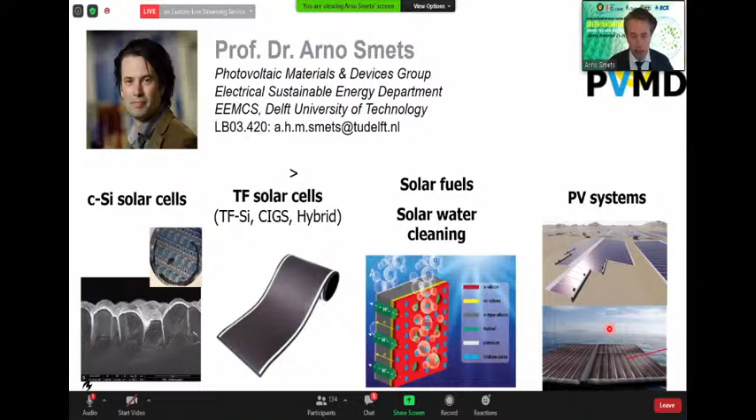And next to that, I've developed on campus, but also online, an education portfolio related to solar energy technology and solar energy engineering. And here you see massive open online courses which we provide on the edX platform, where we already reach more than 500,000 students around the world.

So, talking about energy and the energy transition, it's already 5 years ago that almost 200 countries in the Paris Agreement agreed on introducing policies and a strategy to try to limit climate change in terms of increasing global temperatures to 2 degrees Celsius in reference to pre-industrial times. And it would be very nice if we could limit this to 1.5 degrees Celsius. So these are the policies in place. And usually when I have to explain climate change to students, I make a very simplified picture of what the challenge is.

The challenge is like handling solar energy, because if you look at planet Earth, all processes on the surface of planet Earth, the energy source for that is the sun, the sunlight. And if you look at the temperature of planet Earth, we get an amount of energy in power, which is the solar light, but also planet Earth as an object which has a certain temperature is emitting in the very far infrared electromagnetic radiation out into space.

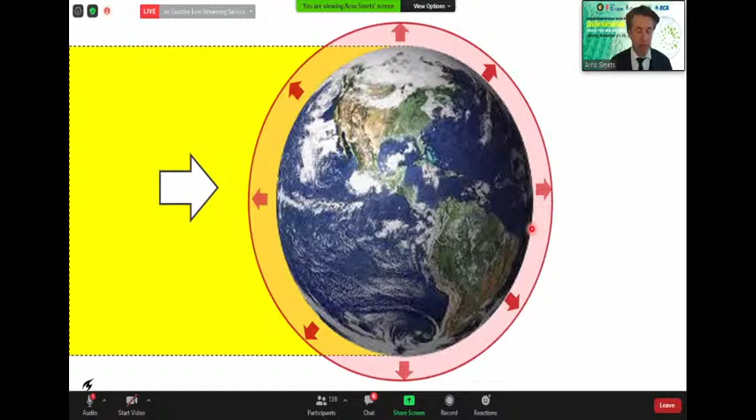And this is no problem if the amount of energy coming in is equal to the amount of energy going out. So then basically the thermal budget of planet Earth is neutral. However, due to our addiction to energy and using fossil fuels as energy source, we are emitting greenhouse gases. CO2 is the dominant one, and that is putting a blanket around planet Earth in which the cooling down mechanism, being the emission of this infrared electromagnetic radiation into space, is hindered. And basically what we see is that we have a little bit more energy coming in than is going out. And this additional energy is stored as thermal energy.

It's already a technological challenge to measure basically what is coming in and going out. You have, for instance, the NASA CERES project, where they try to do this with satellites in space. And the estimate currently is that there is a small energy difference of 0.6 watts per square meter. That sounds to be a very small fraction. But if you do the simple calculation on the back of the envelope, and let's say we would push this excess of energy into the column of air in the atmosphere per square meter, it means that you can heat up the atmosphere by almost 2 degrees Celsius in one single year.

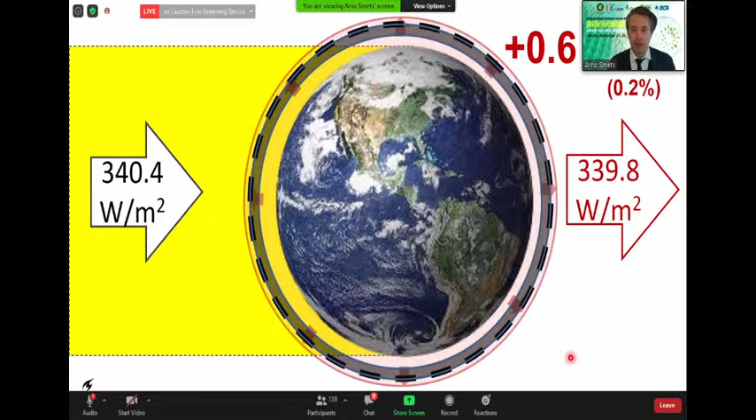This is not happening, and why is it not happening? Because on planet Earth we have the oceans. These are a heat sink, and they consume a lot of this additional thermal energy which is left behind on planet Earth at the moment. And thanks to the heat sink of the oceans, we don't experience the temperature increases in the atmosphere as compared to the 0.6 watts per square meter.

So this is due to the greenhouse gas emissions, and here you see our global CO2 emissions related to only energy. Here we emit a little bit more than 30 gigatons of CO2 into the atmosphere. A lot of that is consumed by the oceans again, a lot of that by vegetation or algae in the oceans. And a small fraction of that is building up in the atmosphere, so the CO2 concentrations are increasing. And still we are increasing. 5 years after the Paris Agreement, the CO2 emissions are still increasing. This year it's expected, due to the limited economic activities due to the pandemic, that this will be decreasing by maybe 10–15%, but that of course is not structural.

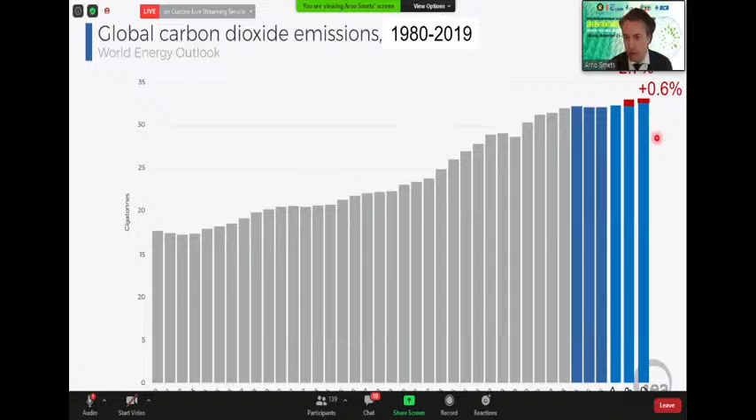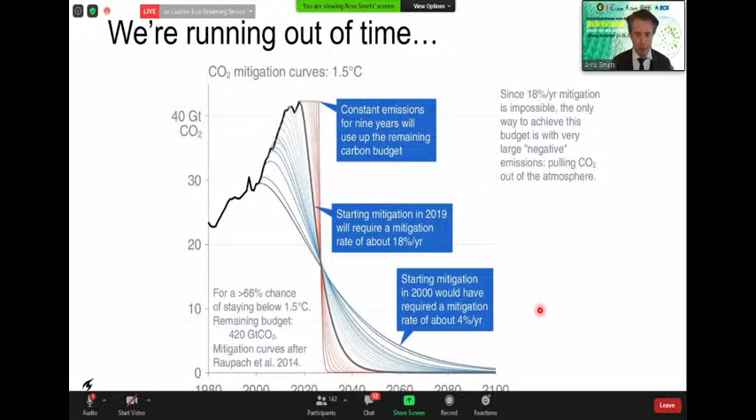And if you look at the Intergovernmental Panel on Climate Change, to keep us, for instance, at a scenario in which we allow the average global temperature to increase by only 1.5 degrees Celsius in reference to pre-industrial times, you see that our CO2 emissions have to go down very quickly to zero. And many scientists even believe that the measures agreed on in the Paris Agreement will not be sufficient to meet this target, and also that in the second half of this century we have to have negative CO2 emissions. So it means that we have to capture and store CO2 as well to meet these targets.

And unfortunately, if we look worldwide, the access to energy and the access to electricity is not equally distributed. So we also have to move to an energy system in which we have a fair distribution of our energy sources. And in my view, solar energy is playing a very important role in that. And to show the importance of solar energy, I first would like to show what nature is doing itself.

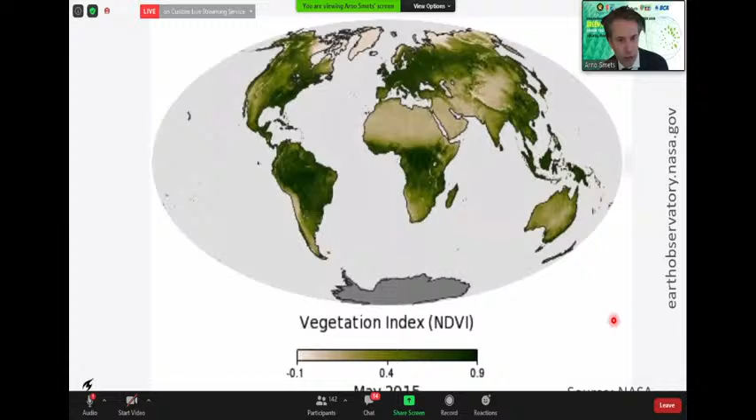But now, how efficient is the whole ecosystem of planet Earth? How much sunlight can it convert into biomass? So I've done a simple back of the envelope calculation, and basically if we average out over the entire surface of planet Earth, then we arrive at a conversion efficiency of 0.05 watt per square meter. That is the amount of energy which nature, algae in the oceans and vegetation on land, is converting into a chemical fuel.

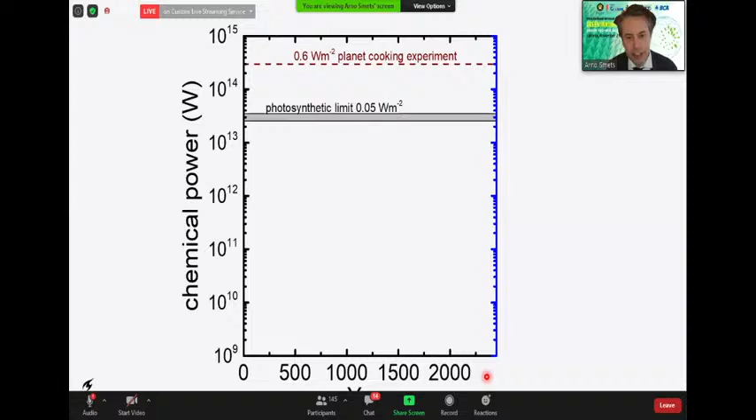And on this axis I have the last 2,000 years on the horizontal axis. So first of all, the world population has been increasing very fast. And certainly from the Industrial Revolution it basically has exploded. So if you just think in the concept like okay, we need energy, and the first primary energy source we need is food.

You already see how much chemical energy has to pass our stomach, and if you look at the natural supply chains of making vegetation, turning that into feedstock, animals and meat, it means that around 7 to 11% of the total photosynthetic power has to pass our stomach. So that is only in terms of food, and this is if you also add our energy consumption, which is usually 20 times more than the 2,500 kilocalories of energy which we need as humans.

So here you see that basically we would have to cut down almost every plant growing around the world. We would have to consume all the algae to supply our energy needs. So it shows that our energy consumption is far from sustainable. So we have to go to sustainable energy technologies.

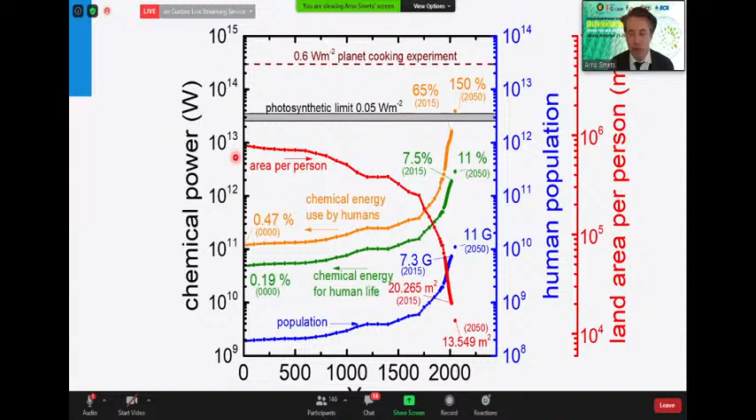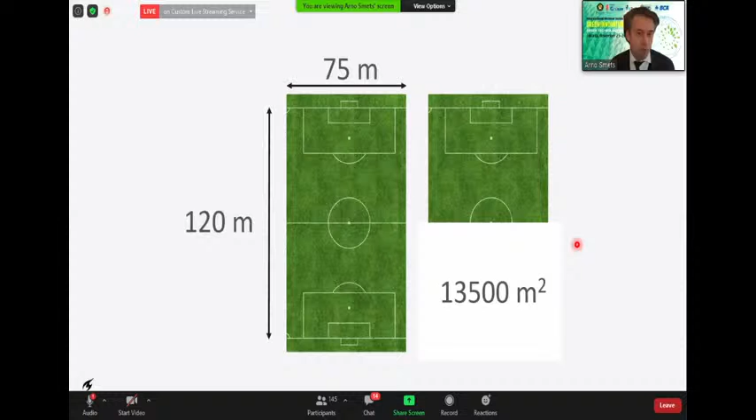And of course, one of the challenges is that due to the growing world population, the amount of area per person which we have is also limited. In 2050, the world population will be so large, and in Europe we always define areas in terms of soccer fields. So worldwide, we will have per person 1 soccer field of land area. And if you then look at highly populated areas like the Netherlands, there we are rather poor. We only have 1/4 of a soccer field per person.

And these are the challenges, because we have to grow our food on this area. We have to live here. We have to build our infrastructure here. And we have to generate our energy on this area. So these are the challenges.

And if you look at the current situation, we use worldwide on average 65 kilowatt hours per person per day in primary energy, which is equal to a continuous power of 20 terawatts. And let's assume that all this energy, which is not going to happen by the way, would be generated by photovoltaics, so solar electricity, and that we would store this energy and then use it again. Including the losses in the storage cycle of 50%, we would need an area like this covered with solar farms to supply our energy needs.

Of course, there are more technologies to do that. Let's say if you would do this fully with wind energy, so offshore, we would have to cover an area like this with wind farms. So these are enormous challenges.

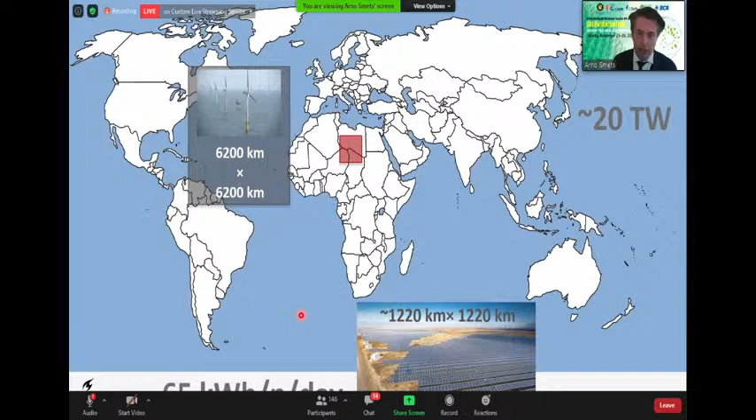So what we see is that we have to become more energy efficient, reducing this number, and we need an intelligent mix of different energy sources to generate energy in a renewable fashion, such that we do not emit CO2, then distribute it and store it in an intelligent way, and then consume it also in an intelligent way, where we focus on energy efficiency in our consumption.

And here you see a little bit of philosophy. If you look at green technologies for generation of energy, like solar, wind, or hydroelectricity, it shows that electricity is becoming the dominant energy carrier. So it will replace for a large part chemical fuels and the fossil fuels as we know them today. It also means that the whole energy infrastructure has to be changed.

Looking at generation, which will be more decentralized, the distribution, storage will become a very important challenge, and also the technologies in consumption. So if you think in terms of mobility, it's moving to more electrically powered mobility, or maybe even hydrogen powered mobility in the future. But also in regions of the world where heating or cooling is important, these will be technologies which are more electrified.

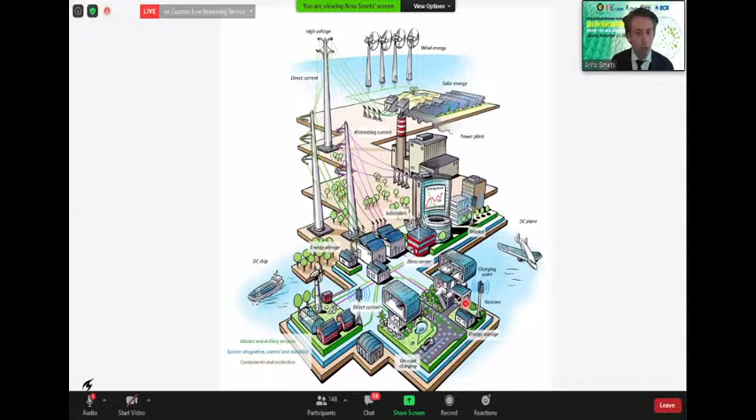And then I arrive at energy transition models. In the world, you have several stakeholders who develop energy transition models, showing that with current technology, can we move to 100% renewable energy infrastructure? You have various scenarios, for instance by oil companies, by the International Energy Agency, and supported by the Intergovernmental Panel on Climate Change. But for me, one of the most inspiring energy scenarios is that of the Energy Watch Group and Christian Breyer. He's a professor at LUT University in Finland, which has done this calculation in great detail for the entire world.

So every region has its own challenges in the energy transition. But this report shows that you can successfully go to 100% renewable energy infrastructure, even without using CO2 capture technologies, as I mentioned earlier, with existing technology. What you see in this transition model is that electricity is becoming the dominant energy carrier.

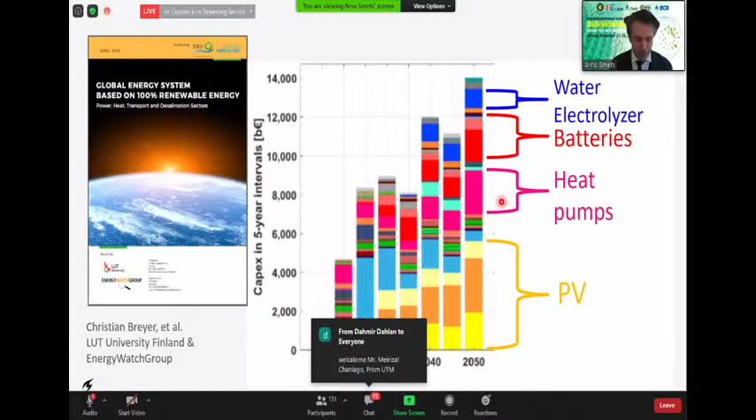So, as solar is so important - and of course it's my field of interest - I will focus on solar electricity, because if 69% of our energy should be generated by photovoltaics, we need a very reliable technology with very high conversion efficiencies per area, so very high yields.

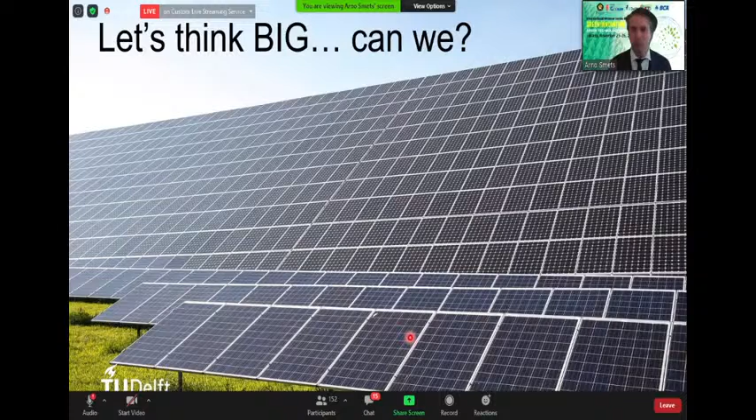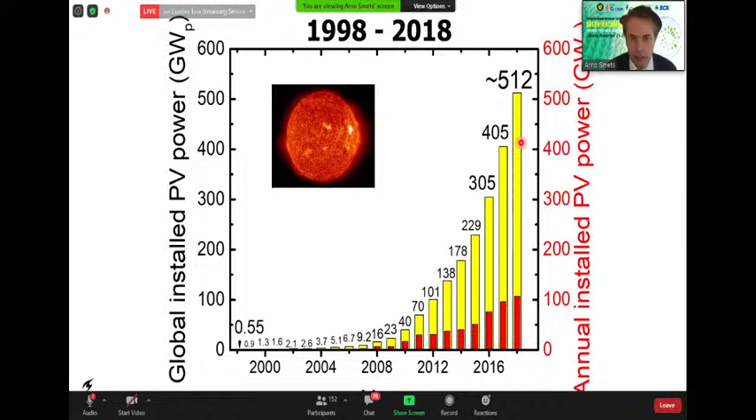The yellow line is the cumulative installed power, and the red is the annual market, the annual total capacity added worldwide. You see that this is around 20 to 25% of the cumulative installed. So PV still demonstrates an exponential growth.

This is very important. If you look at different energy generation technologies over time, here is our energy demand growing due to world population growth and rising average living standards. Take hydroelectricity: with the introduction of the Francis turbines, we were able to efficiently convert the potential energy of water over a height difference using dams into electricity. Here you see how the total installed effective power, meaning the real power being delivered, has evolved over the last century.

Here you see, for instance, nuclear energy. The vertical axis is a logarithmic scale, and you see generation technologies increasing first in an exponential phase, then reaching a linear phase, and then the technology saturates. If you look at the two biggest new renewable energy generation technologies, wind turbines and photovoltaics, you see that we are in an exponential growth phase as well.

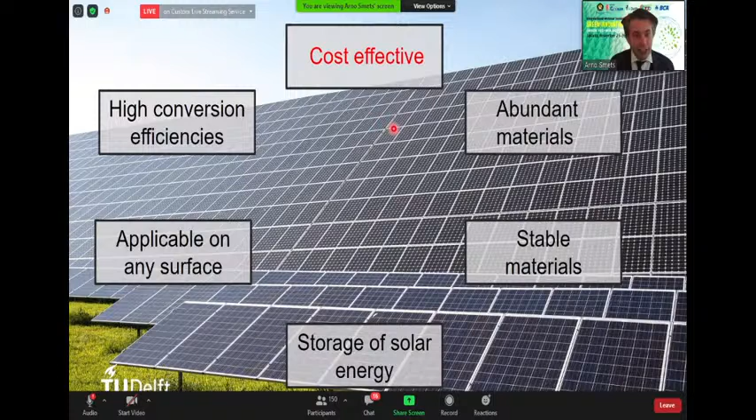This is what we call learning curves. Interestingly, we as human beings always have trouble thinking in double logarithmic plots, because we always underestimate how fast a technology can become cheaper and competitive. This is one of the reasons why the International Energy Agency underestimates the important role of solar electricity in the future.

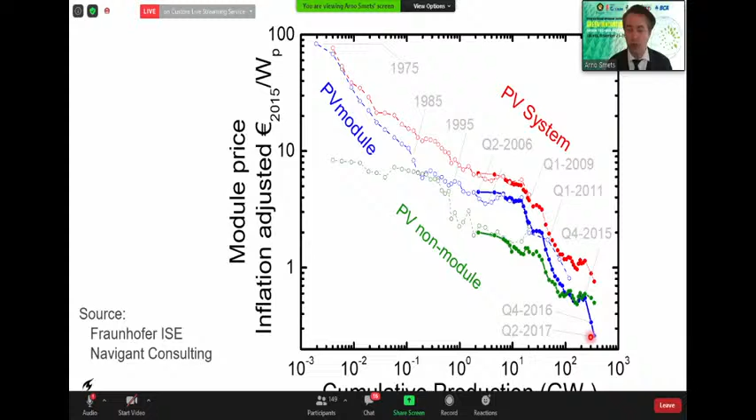That is included in these costs. So what you see now is that the modules are not even the most expensive component of a PV system anymore. It's all the other stuff which is more expensive.

That's quite interesting. Of course, if you look at the energy infrastructure, it's more than only generation. It's generation, distribution, storage, and consumption. But in terms of generation, renewables are becoming very cheap. In that sense, they are becoming a kind of disruptive force in fossil fuel-based energy infrastructure.

So now let's move to the PV technologies. For PV technologies, you often have the very famous chart of NREL. I lost it in this presentation, but I usually present the different technologies in terms of efficiency, but also in terms of area.

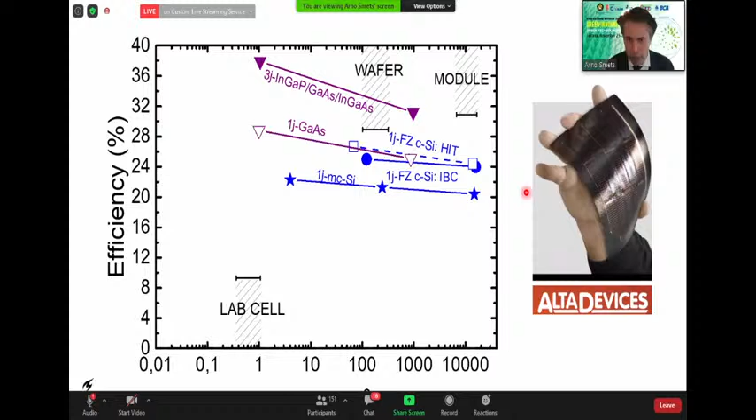And then you have the thin film technologies. The biggest manufacturer worldwide is First Solar. They make solar cells based on the semiconductor material cadmium telluride, using a very thin layer of material, not more than 5 microns, so that's 0.005 millimeters. The thickness of the semiconductor material for crystalline silicon is in the order of 140 to 180 microns, so these technologies are a factor 100 thinner compared to the conventional technologies. So you use less material. It also gives the advantage to develop next generation PV modules, like the flexible module you see over here from Alta Devices, and I will come back to this technology. What you see is that the conversion efficiencies are lower than crystalline silicon, but you use less material and you might produce this at much lower cost. But I will come back to that.

And then you have the new materials rising at research institutes and universities, based on organic type semiconductor materials. The new kid on the block currently is perovskites, and a lot of research is being done at universities. Both materials still face problems because they are not very stable yet. For instance, perovskites may suffer from light and temperature, the material decomposes, and they are also not very chemically stable, so you have to spend a lot of money encapsulating and protecting them against moisture and water, because water chemically breaks down and dissociates these types of materials. So they are only in the research stage, there are no commercial products on the market, and it's still a challenge to even bring them to the market, in my view.

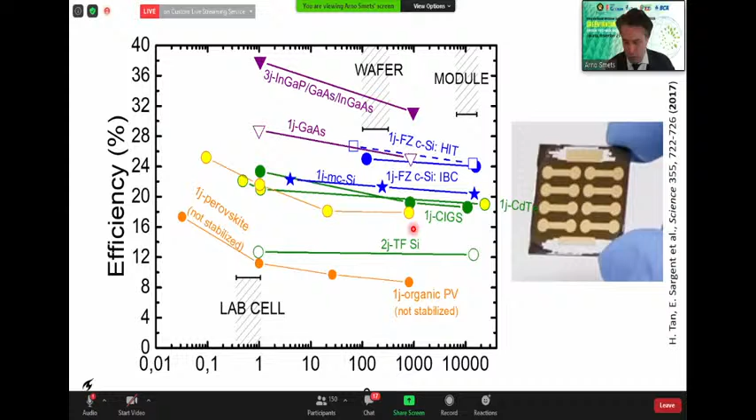So what I will be focusing on is the thin film here, and certainly the thin film silicon technology. We are working together with the HyET Solar company on developing this technology, which in certain metrics will have a lot of advantages. It will give different opportunities to different applications than the nowadays dominant crystalline silicon technology.

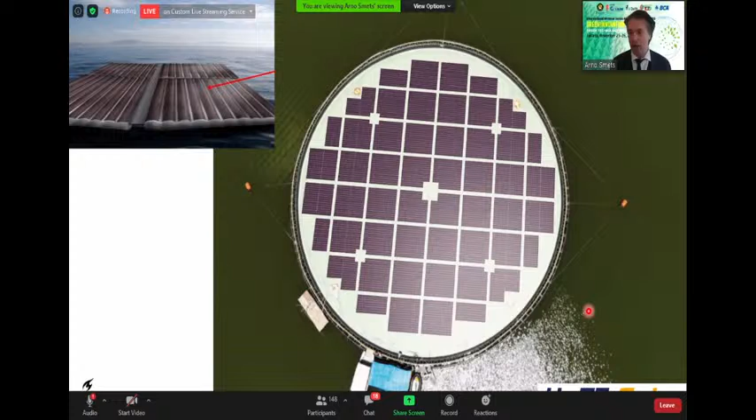And if you look at large-scale utility, here you see a visionary plot where you can simply roll out this lightweight, flexible PV technology. So it's easy installation, but you also need much less mechanical components to mount the systems, which is currently a very important part of the cost price of the technology. So it's a new technology which allows the entire system to go to lower cost.

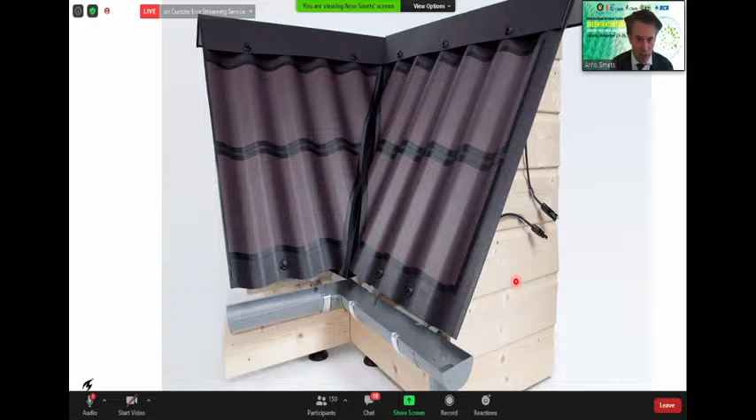But even in the Netherlands, for instance, we have many industrial buildings with flat roofs in which the construction is built just to hold, in the extreme situation, 30 centimeters of snow. These roofs cannot carry the current glass encapsulated technologies, but they can carry a lightweight product. So you have certain roof constructions which you can cover with such a lightweight, flexible product as well. So the space of application is increasing.

HyET Solar is developing this, and it also has an agreement with industry in Indonesia to build one of their manufacturing plants in Indonesia. Because as I showed you, this technology has unique properties which will benefit electrifying neighborhoods and areas, even rural areas, like for the last mile electrification challenges. So this PV technology is very helpful, and HyET Solar is going to build a manufacturing plant in Indonesia, also to supply the local markets there using the local supply chains.

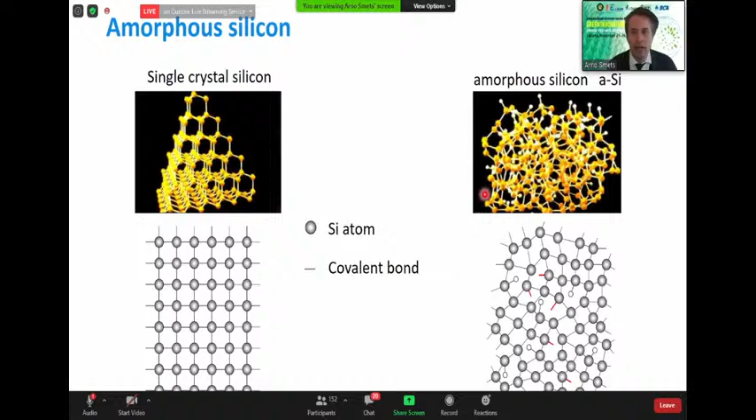And so in this technology, in one of the phases we use this type of material, and we're using something which is a mixture between crystalline silicon and amorphous silicon, and that is shown in the next plot.

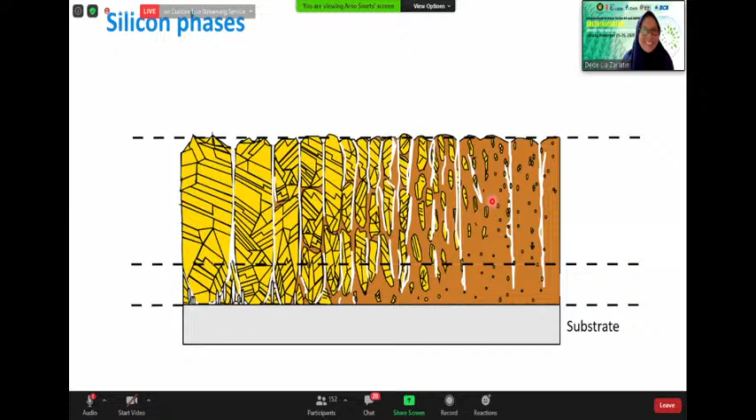Sorry, Prof. Arno, your time is about another 10 minutes. Another 10 minutes. Okay, thank you. Yeah, sorry. Don't worry. Because we have a question and answer session. So then I will speed up a little bit here.

So we have these different phases, and if you talk about solar energy, you're talking about light absorption, creating charge carriers in the semiconductor material, and collecting that. It means that you have to transport your charge carriers, and you have basically two mechanisms to do that. It's diffusion, which is based on density differences, but you can also apply an electric field on a solar cell. So there you can move the charge carriers.

So, sorry, I'm being disturbed by another program.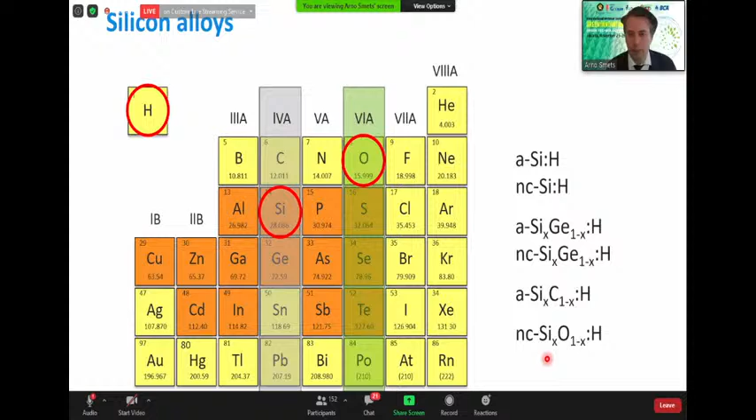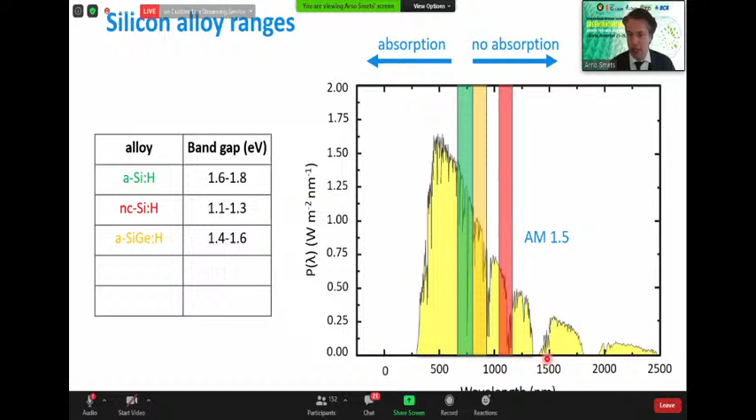So here you see the materials which are used for these technologies, and what you see is that these technologies are heavily dependent on the four-valence materials here, like silicon and germanium, in combination with oxygen, carbon, and hydrogen. These are all the typical materials used here. The interesting thing about using different materials is that they also absorb different parts of the solar spectrum, and you can use that in very smart ways in what we call multi-junction solar cells.

If you look at the solar spectrum, it consists of discrete packages of energy. We call them photons, and in the blue part of the spectrum those photons have a lot of energy, and in the red part of the spectrum they have not that much energy. So what you see here is the absorption of the photons and how the energy excites electrons from the valence to the conduction band, creating free charge carriers. But in this mechanism, part of the energy in the light is not really used. You only have to cross the threshold energy of the band gap.

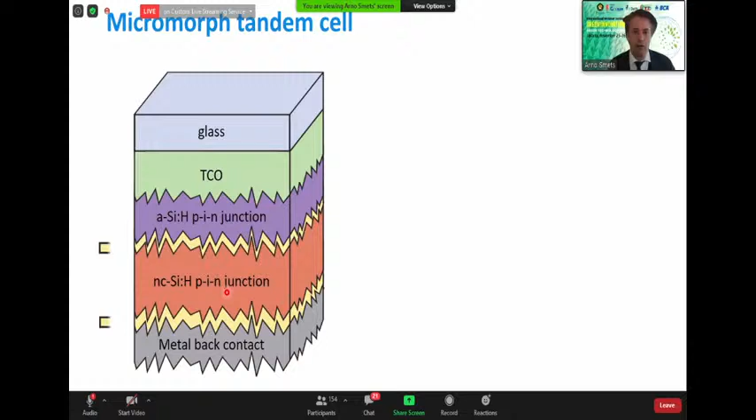So using more types of materials in what we call multi-junctions means that you can more efficiently use the energy in the spectrum. You can generate higher voltages at the same current, with less excess energy that you don't use. And this is basically how the solar cell looks. You have a top cell absorbing the blue and greenish light, and the bottom cell absorbing the red and infrared light of the solar spectrum. This is the typical structure of the solar cell, and also the typical structure HyET Solar is producing in modules.

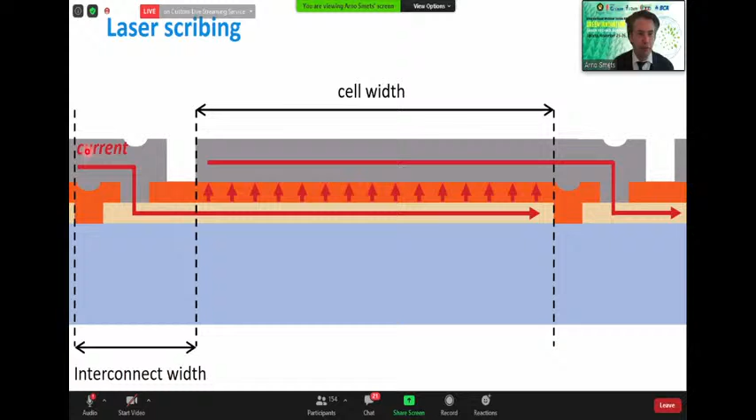And this is different from the crystalline silicon technologies. There you just have cells that you connect with aluminium bars or metal bars. Here you do that with laser scribing, and then with smart tricks you connect the front side of the previous cell with the back side of the next cell, so you can connect them in series. The thin film technology has been developed by many companies, universities, and research institutes worldwide, so it's a very mature technology.

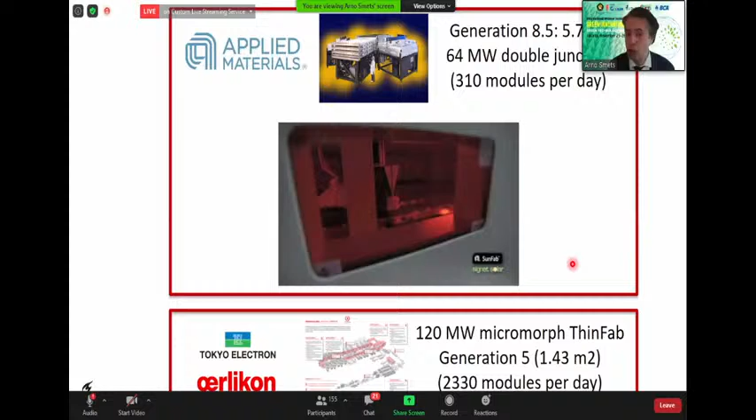And here you see that there are a lot of industrial production lines being developed to deposit this technology on glass. HyET Solar is unique because they deposit the solar cell not on glass, but on a temporary aluminium foil. It's just aluminium kitchen foil, and on that they first deposit the entire structure of the solar cell: the metal oxide layers, the semiconductor silicon layers, the metal back contacts,

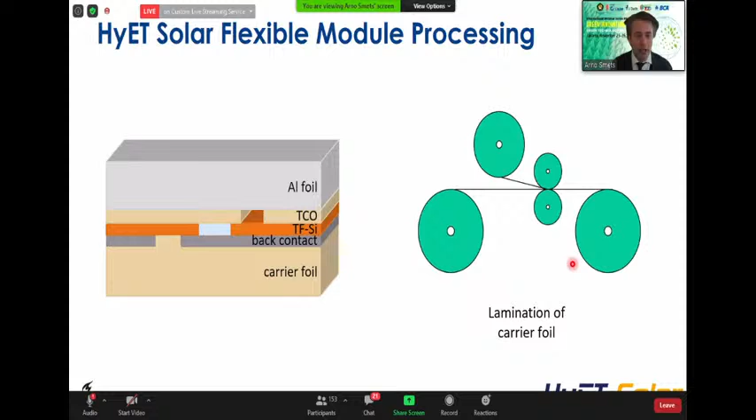and then they do the laser scribing, making the structure, designing the solar cells, then add a carrier foil to that, then remove the aluminium foil at the front side, and then connect the encapsulant there, and then you have the flexible product. So they use the aluminium foil as a temporary substrate to end up with a flexible product

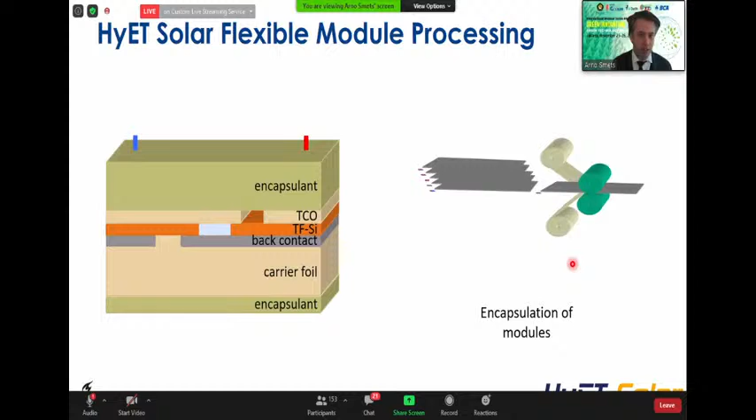like you see over here. Sorry, Prof. Arno, you have another 3 minutes. 3 minutes, yes. Yes, so, sorry.

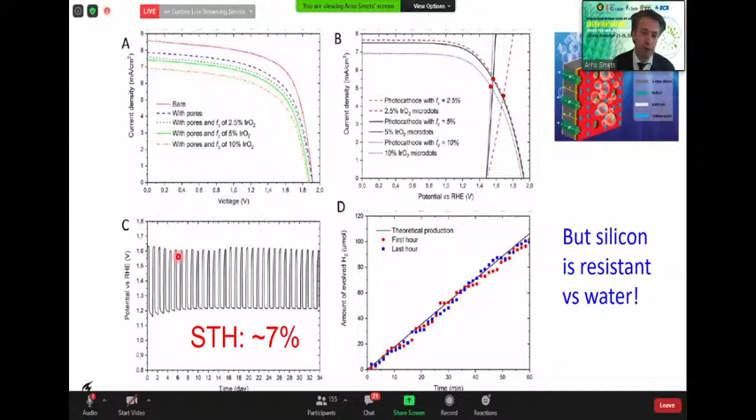So this was hanging in water for 30 days with no reliability issues, demonstrating that silicon is very reliable against water. And here you see that you can make it very, very cheap and reliable. And the source materials being used, if you compare them to other materials. So here is the abundancy of materials worldwide.

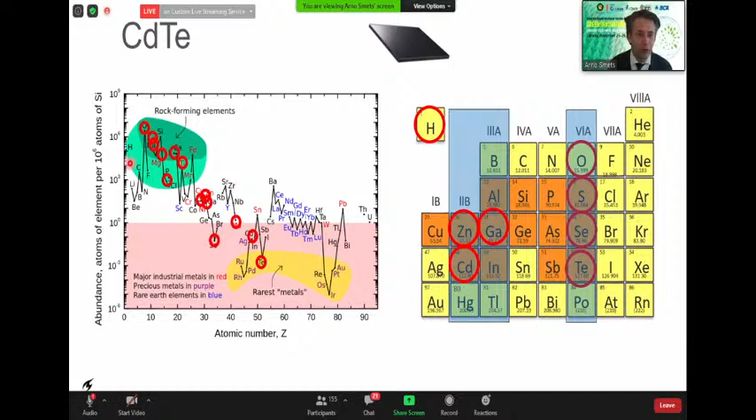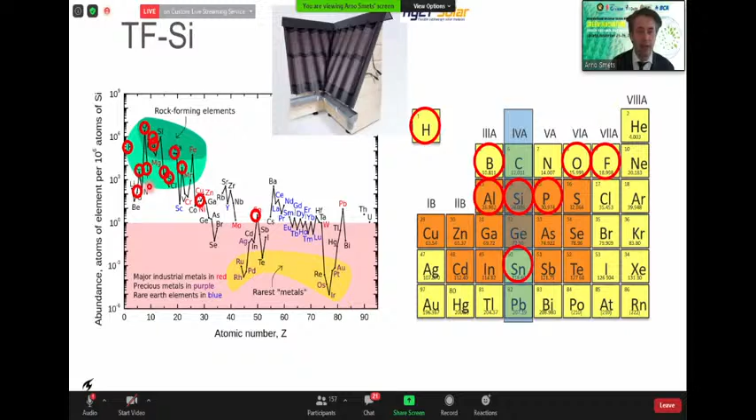And here, cadmium telluride: this technology is dependent on materials like tellurium, which is not abundantly available. What you like to have is technologies which depend on the first third of the elements in the periodic system. So, for instance, CIGS also has some issues. The new technology perovskite has some serious issues in terms of abundant materials. Thin film silicon you can manufacture from abundantly available materials, similar to crystalline silicon.

And the advantage is, here you see the wafer thickness, and here the silicon utilization, so the grams of mass used per watt peak of generation. And you see that crystalline silicon has gone through an enormous evolution, so less and less material is used to produce the power. Here you see that thin film silicon technologies can be a factor 100 more efficient in material utilization. So you use 100 times less silicon material for the same power produced.

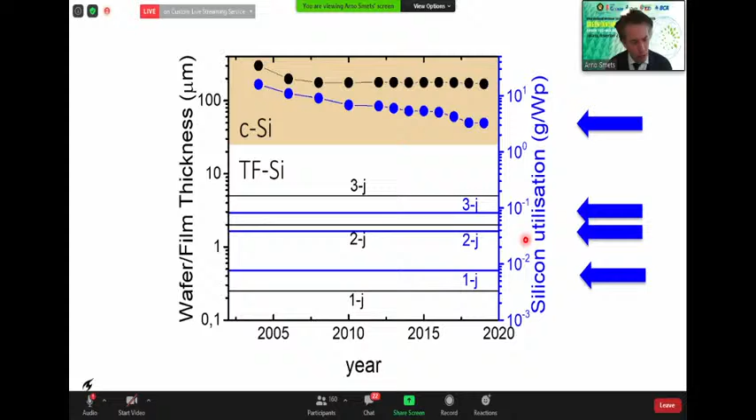And this is certainly becoming important if we think about silicon supply chains, if we need 70% of our energy generated by solar electricity in the future. And this also allows us to have those very fancy applications you see here, where we can have a very cheap balance of system. And here you see, for instance, comparisons with crystalline silicon. What is the total cost of the system?

So here the blue is the cost of the modules. Orange is the balance of system, the mechanical parts, for instance. If you have an 18% crystalline silicon module product, you arrive at these cost prices. If you use thin film silicon, for instance for a fixed rooftop or a floating application, you can save a lot of money in the balance of system, in the mechanical parts, making the normalized price of this new technology much cheaper.

And so, sorry, I would like to conclude here. Okay, sorry. We have a lot of questions already waiting.

So this shows the advantages of this thin film technology for the future. So the conclusion is that a new technology gives new opportunities for how to use PV technology in the integration of small systems up to large systems.

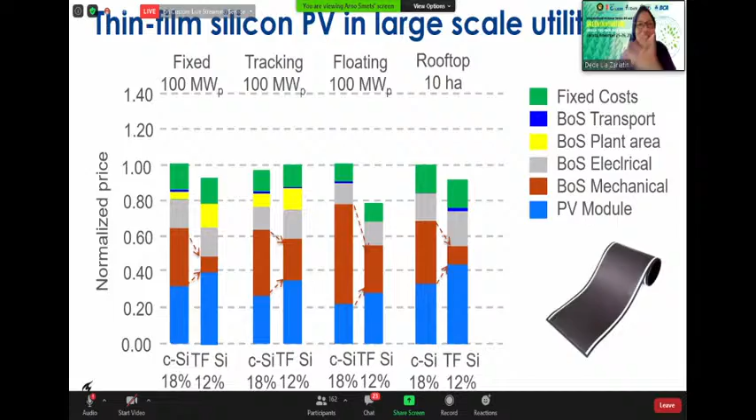Okay, hello, Professor Arno. I'm Dede. I'm head of the Entrepreneurship and Career Development Center at University of Pancasila. A few days ago, I invited Mr. Latif as a resource person in a webinar about research collaboration as an alternative to the transition internship before entering the world of work. I hope Professor Arno can be our next source in collaborative research for students and lecturers at University of Pancasila. Could you, Professor? Okay, thank you. So my question can be asked directly to you.

So, Mr. Arno, in Indonesia itself, we have encountered many models of solar energy, but I believe this is very different, of course. So how do you predict the use of solar energy in Southeast Asia related to the unpredictable climate now? Can it be used for energy saving, and can it be placed in housing in small quantities to produce the maximum for the housing, because it is very expensive to invest in, of course. Thank you. That is my question.

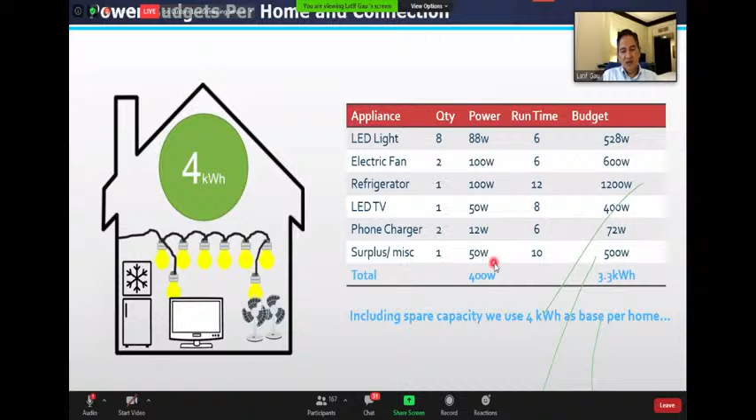So you can see here where we come up. So currently they have only 3 hours electricity per day. We will go to 24 hours, 24/7. They have only 25 watt peak per day, and we go for 400. So 3 hours times 25 is only 75 watt hours. And we are going to make 4,000 watt hours per day. You can see here the difference in cost. This is per watt. So this is significant reduction in cost.

We supply the technology, including the battery. That's why we can go up to 24 hours, 24/7. How do we do this? This is our technology. Then we show you a little bit. So the power generation is still based on thin film. No, PV. In this case, we still use crystalline PV because our factory for thin film is not available yet.

This is our system. Storage system. We have communication information, battery management system inside. We can also connect it to the internet Wi-Fi, so we can control from a distance with a mobile phone or on the monitor, and we can distribute it to homes. And we can also switch off a specific home if it is necessary. For instance, if they don't pay or there's nobody home, we can switch it remotely.

The system looks like this. We can have a solar input to the charger to the storage. We can even have a genset if it's necessary, but in this case we don't need it. We can also charge the battery with a windmill or even from on-grid, and we can also light up the telco tower if necessary.

I show you the equipment details. So the PV system used to load the system, we have 250 kilowatt peak, 250 kilowatt hour generation per day for that solar panel. We have a load and charging the battery. We have 100% daily capacity. This is about 1,400 square meters of land needed. If you use thin film, it will be different, but this is still standard crystalline technology. In total, 950 panels.

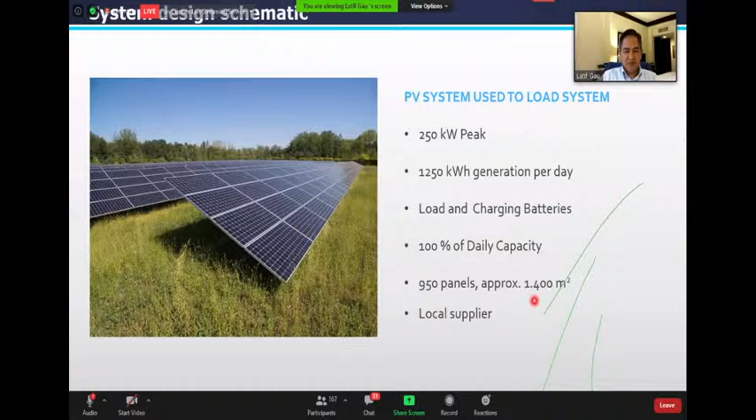If we have floating panels, that will be much cheaper, of course. But for 1 megawatt hour per day, we need about 1,400 square meters of land. The system inside, we have a storage system. We store with a battery, with a solid lead crystal battery. I'm going to explain a little bit on this later. We have 2 megawatt hours. We have 3-phase. We have 250 kilowatt inverter.

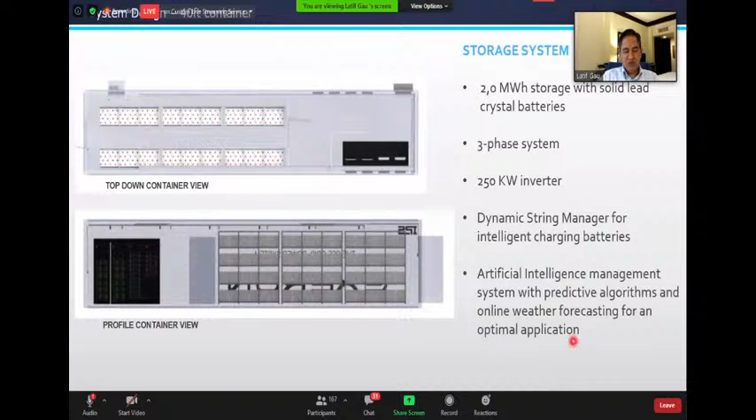Dynamic string manager. This is actually charging the battery with an intelligent battery charging system, where we have what we call BMS, battery management system. And inside the container, we have also an artificial intelligence management system which can predict with algorithms and online weather forecasting for optimal application. This technology is actually used by NASA to predict the radiation and sunlight, how many hours per day, when it will be raining, and what autonomy is possible. It's all inside the system.

Inside the system, we also have all the communication we can control. This is actually the system we put in the package. So we have power monitoring system and fire monitoring, site security, and other applications. So we can monitor the performance of the system from a distance by using remote and Wi-Fi. We can check the tank, genset, temperature, smoke, fires, remotely. All these things are inside.

So the main key is the battery. Again, the critical thing is the battery for energy storage. Our storage system, we call it crystal battery. This is a unique technology to overcome conventional battery problems by having an all solid state electrode, allowing us to charge and discharge deeper, meaning we can have a DOD of up to 100%. We can use it as often as we want and it can have a very long life, until 15 years or even more. We are going to prove this on the island to show the government and the user that we are convinced with our product.

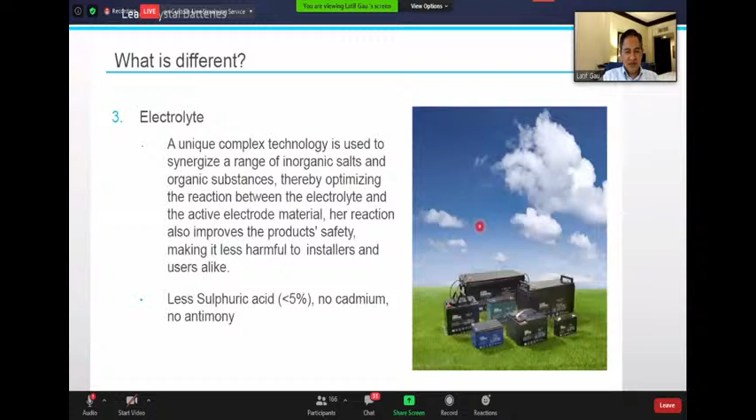To give you a little insight about the product itself, I want to show you a short video about the test program - how we test this battery in a very harsh way. Let me show you the video. This is the test process which we did for this battery.

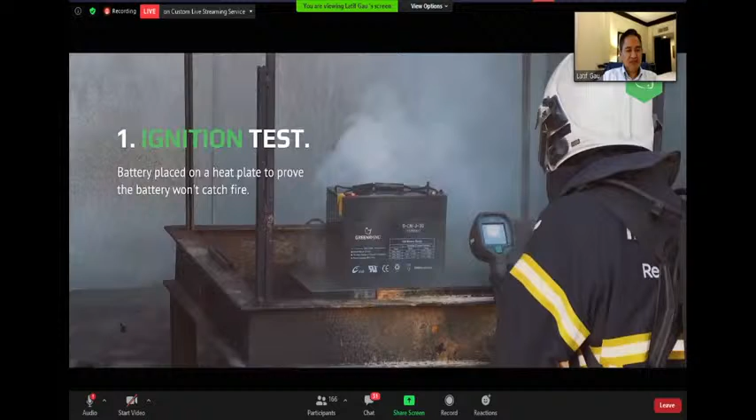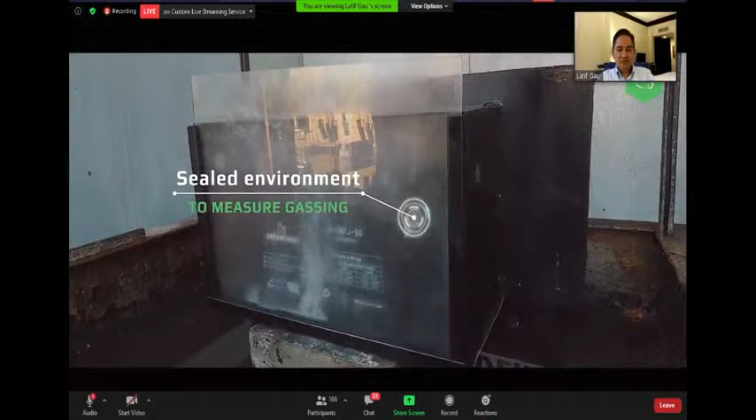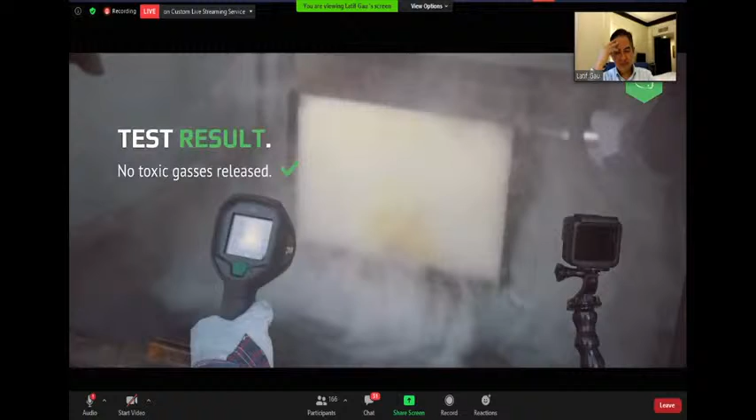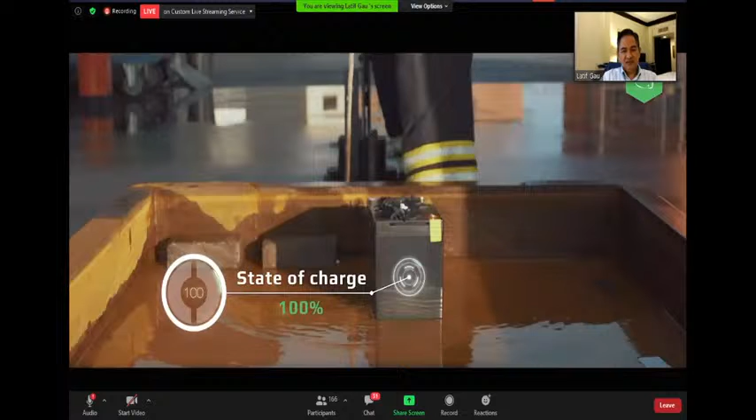This is the ignition test. We try to ignite it with a very hot plate at 300 degrees and let's see what happens - no forced ignition. Toxicity test, yeah. Fire test - if the building is on fire, there's no explosion. If you compare with lithium ion, it will burn the building. Function test - still operating, still good, still functioning.

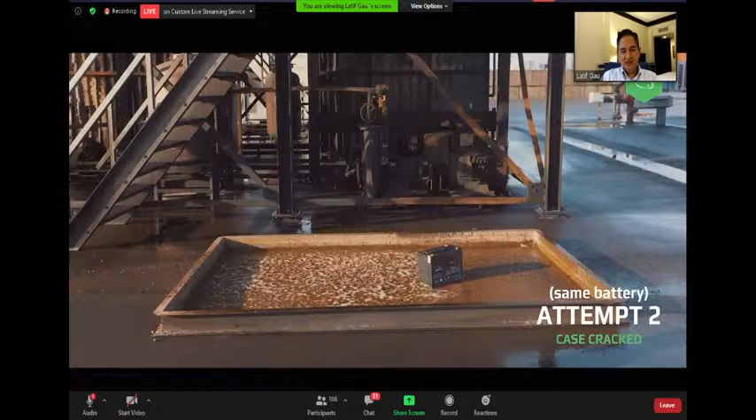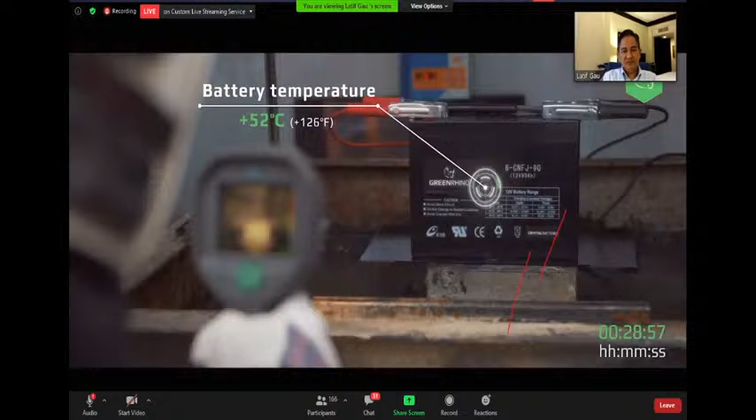Drop test - first attempt, nothing happened. Second attempt, then you can see the damage, but it's still functioning. Overcharge test, yeah.

Okay, so that's about the test, and I want to show you the comparison of all battery technologies available nowadays. You have lead acid, which we call wet battery or battery basah - this is the standard one for cars. We have gel battery, AGM, which we call battery kering in Indonesia, and we have our crystal battery. We also have lithium ion and nickel cadmium. You can see in the chart, temperature can go up to 65 degrees, same with nickel and lithium.

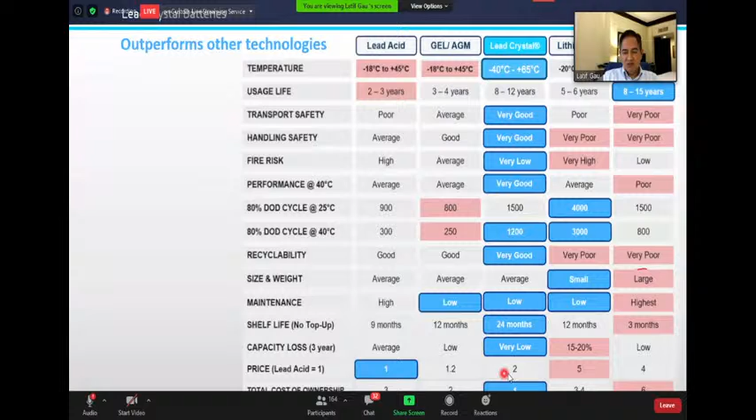So basically, going into the price, which is also a very important parameter - if you take lead acid as a standard price, let's say $1, then gel or dry battery kering is about 20% higher than lead acid. Our price will be 2 times higher than lead acid, but it's 5 times higher for lithium ion compared to lead acid, meaning our price compared to lithium ion is less than half. Nickel is 4 times. So if you talk about total cost of ownership compared to lifetime, toxicity, transport, storage and everything, this battery is the best in total cost of ownership.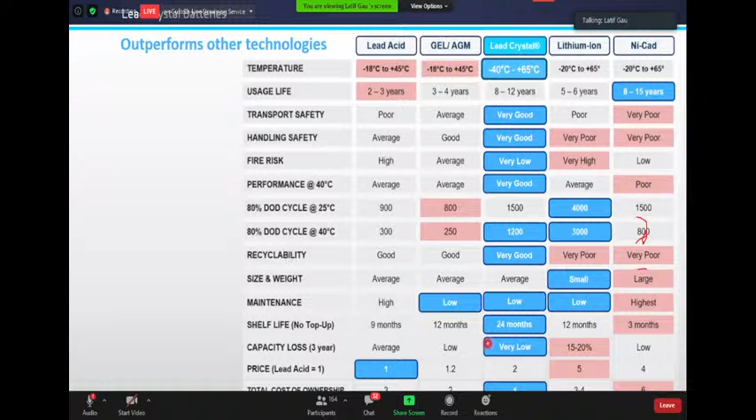So if you see the key features, the long lifetime can go up to 18 years, because if you see the cycle curve at 25 degrees, 12 volts, you can have a number of cycles. If you have only a DOD, depth of discharge, of only 10%, it can really go up to 18 years, 20 years.

Deep discharge capability, you can charge from 100 into 0 and it will go back again. It's not the same with lithium ion. If you compare with the one in our mobile phone, in one year time, the degradation is even more than 10%. So it's normal when we buy a new phone, we can charge it once and use it for one day, even two days, but a year later we have to charge it every day. But with the lead crystal, it's not necessary because the degradation is only 1% per year.

So these are the features. We can have fast charging, it's a 0.3C charging system, meaning we can charge it very quickly. It can handle extreme temperature, from minus 40 to plus 65. It's the safest, no thermal runaway, no gassing, no leakage, no spontaneous ignition, will not burn. Long life, if we store this battery for 2 years, the capacity will still be there and will not degrade. Because it's green, from organic material, it can be recycled up to 99%. Of course nothing can be recycled 100% because you always have waste. But this is green, non-toxic, and very environment friendly. And the crystal technology, because it's from organic, inorganic salt, it's a very unique crystal, and the plate is also powerful in usage.

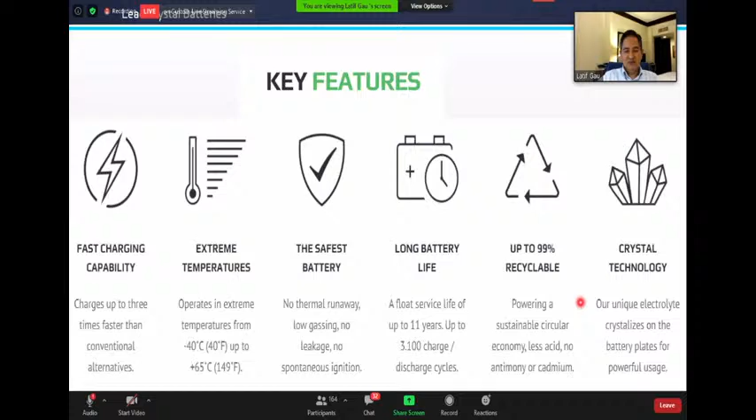This is actually very easy to transport. Extreme temperature quality is guaranteed. The pricing, I mentioned it.

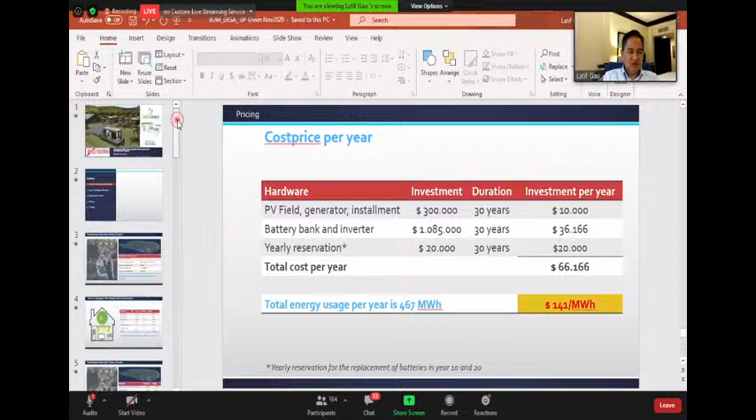So again, for the solution for remote islands, once we have the thin film technology, it will be the best match, because then we can have a floating application on the island, especially where you don't have much space available on the ground. Then you can use the sea, and have a very cheap and reliable application. I think that's it, go back to this calculation we have, but I think that's my presentation, just to give a hint about the application of this technology using the right storage technology.

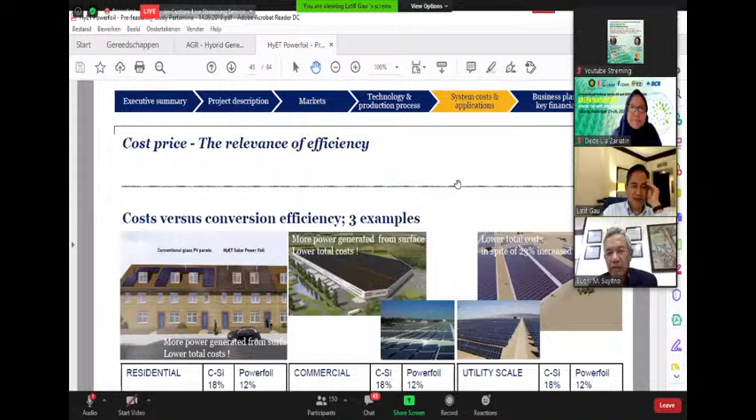Yeah, I can add a little bit on that, Pak Budi. I'll show you this comparison. This is our feasibility study together with Pertamina. So if you see here, we compare crystalline, which on glass is 18% efficiency, with ours.

The thin film is 12%. Generated power megawatt hour per year, we are double. So efficiency here is not really a matter because it's pure about the space area. You can see here, Pak, area utilization is 4%.

This is an example, Pak. You can see here, because it's crystal, it can only cover a very limited area because it's glass, it's square. But for our thin film, we can cover all area. It's plastic, we can cut it, we can bend it, so we can cover all the area. That's why the power generation is even double.

You see the efficiency is higher, 18%, and our efficiency at this moment in our factory is 12%. We are going to increase our efficiency to 20%, 18, 16, 20% in the coming years.

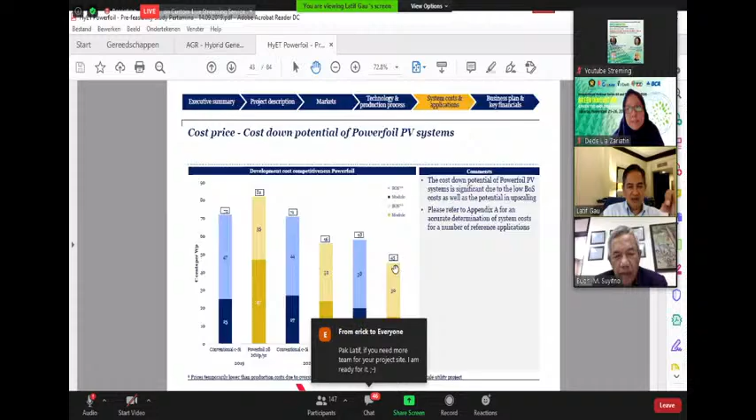But if you compare only the efficiency compared to the crystalline and the thin film, you can see here the comparison - the cost is half, 6 cents to 3 cents, and the same for others. For that, I can show you many examples - this is my pre-feasibility study.

We do it with Pertamina. So we cover all the shape of the roof. So if you talk about this efficiency, it's purely about the space. But ours can be used in any shape of the space. So efficiency is not really relevant here.

And this one part you can see here is in Malaysia. If you use only crystalline, then you cannot cover it fully like this. You can only cover maybe only 40% of this space here because of the square meters, the rectangular glass, a heavy product from crystalline. But with thin film, you can cover the whole space.

And it can also be integrated with the panels, I mean the roof panel. You can use it here, you can use it on top of this. So, and the battery, yes. Again, the comparison, I can go back to my presentation if you want.

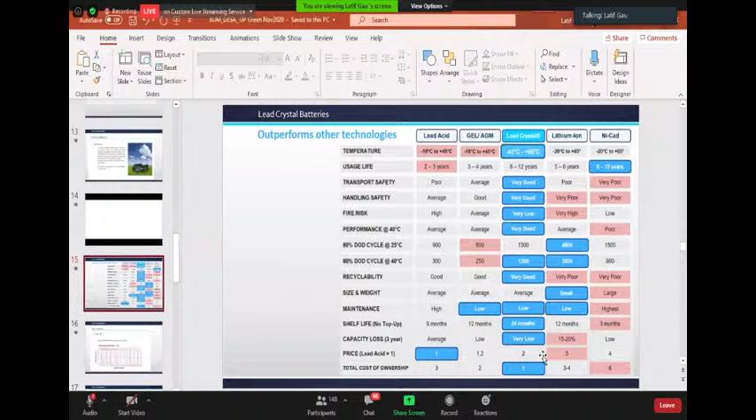So again, Pak, I want to make sure that you understand my presentation about the efficiency. So this is the comparison, Pak. I don't have the graphic. But basically, our degradation per year is 1%. And the lithium ion is 10 to 17% per year.

That's why the degradation of the lithium ion is very high. You can check with your mobile phone. The first year, you can charge it once and you can use it for 1 day. But in 1 year time, you have to charge it every day and it can be used only for a few hours because the capacity degradation is very high for the lithium.

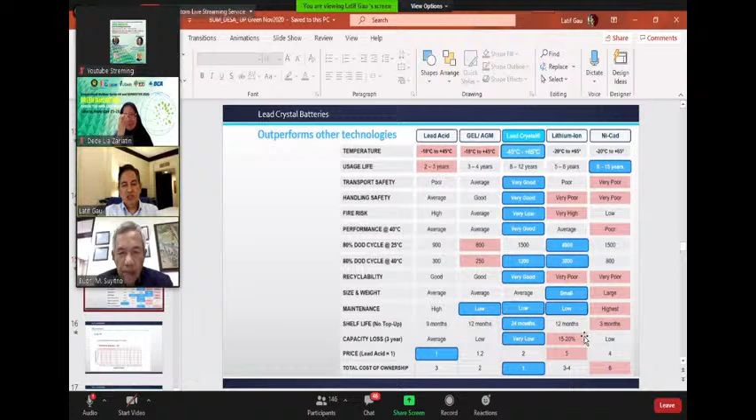That's why we can guarantee. I also talked about this with PLN. I can guarantee for 10 years. Oh, good. But because of the budget and all those kind of things, I say make it 5 years. For me, it's easy to give a 5 years guarantee.